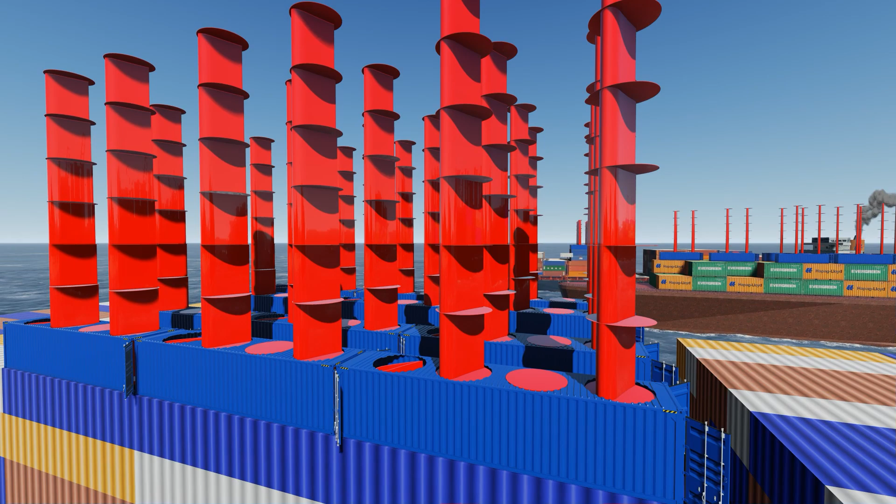So container wings is a solution for contributing forward motion of a ship, harnessing the power of the wind. These wings are fully adjustable. They're telescopic. They raise, they lower, they rotate according to the wind. And putting them on top of the last row of containers of a ship allows us to put back this big giant sea of sails, this sea of wings that can help reduce fuel consumption.

And by reducing fuel consumption when the wind is right, it means we reduce digging up all this fossil fuel, and we reduce emissions that contribute to climate change. The container wings that you see here are part of a really sophisticated system. There can be literally hundreds of these things on a ship, and they're all rotating autonomously, finding the best angle pointing towards the wind to contribute towards forward motion of the ship.

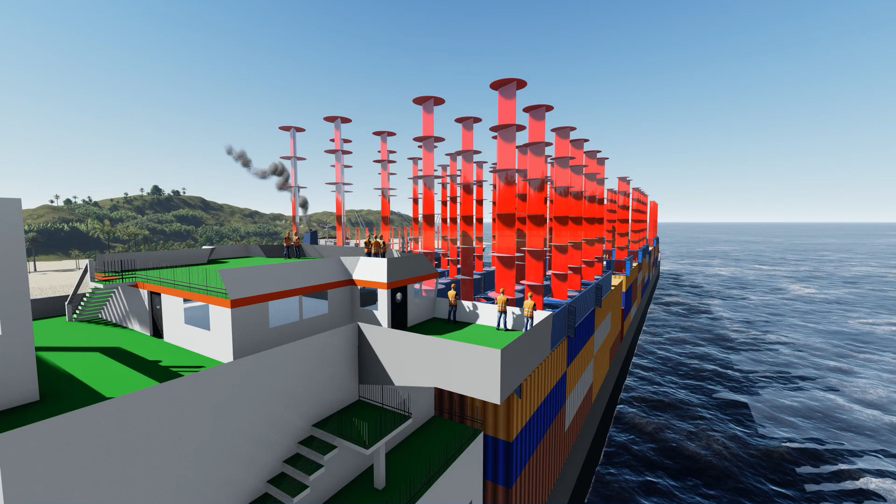They all talk to each other, they all know where they sit relative to each other, and through a wireless network, they're all controlled back at the helm of the ship. So not only are they autonomously controlled, but they're obviously controlled manually as well in varying weather conditions. And as the wind changes, they can be lowered. So container wings can be adapted to any ship.

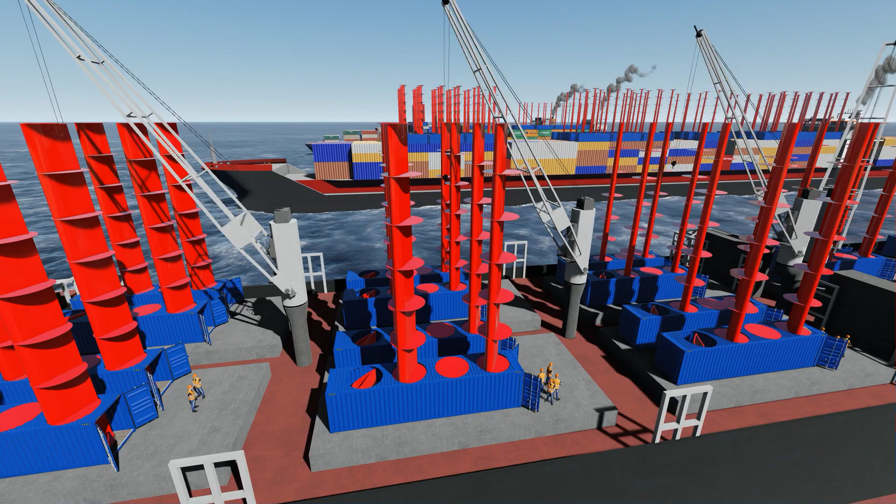So looking at a bulk carrier, the containers can be mounted to the lids that open up above the containers, and you can contribute to reducing the amount of fuel that's used, and to lowering your emissions, by including a mechanism that uses wind to assist in forward propulsion. On this ship we can see 20 containers, each carrying 4 wings, and they're 50 feet in height per wing.

The nature of shipping and logistics means that the wing containers can be located at various ports. They can be picked up depending on the run. So if there's going to be a crosswind run or a downwind run, maybe a ship really wants to stock up and load up heavily with the wing container system. Maybe there's not that many available in a port, but they can pick up whatever's available at the time.

And particularly if they're expecting crosswinds or downwind runs, the surface area and the actual wing shape of the container wing is obviously going to contribute towards forward motion as best as possible. The shipping of containers is an amazing logistics game, and as part of shipping, ships need to know what the weather's doing at all times.

Yes, they run to deadlines, but you may be in a position where this ship is running downwind or a crosswind, and it can pick up enough of these container wings to contribute towards lowering fuel consumption and lowering emissions. The software allows for delivery of the containers to be loaded on last as part of the ship's organisation. They get unloaded first, they get put aside.

The swapping of containers gets done in a port, and then of course the container wings get put on last. And of course, being containers themselves, they don't need to have their wings up. They can be shipped around the world just as regular containers.

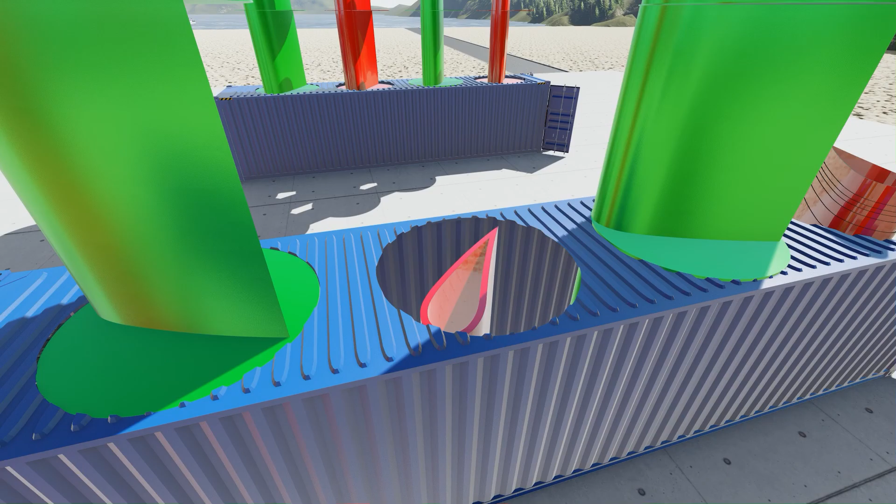We're just having a bit of an opportunity to look inside the container at the shape of that aerofoil wing. They're deliberately not symmetrical. They're deliberately in an asymmetrical wing shape. We do this because it's far more efficient.

Looking at the containers themselves, they've obviously been modified. So this is a 40-foot shipping container. It's had 4 holes cut into the top of it. And the wings, there's 2 starboard wing modules and 2 port wing modules. And they are simply forklifted in, and each of the modules can be easily taken out and loaded back in.

So this shipping container is a standard shipping container. They can be built as a double shipping container, but it makes it very difficult to obviously transport them around when not on ships, i.e. via the road.

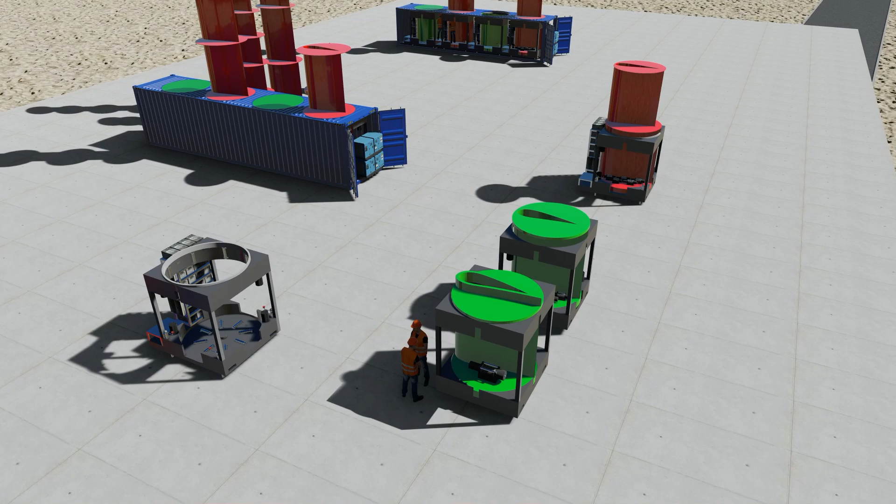So let's have a look at the individual units themselves. At the base of the wing, you'll be able to see 2 winches. These are what are known as captive winches. They're electrically operated, and they're connected to cables, and the cables are rotated around a drum, and when wound up, they lift the telescopic action of the wing.

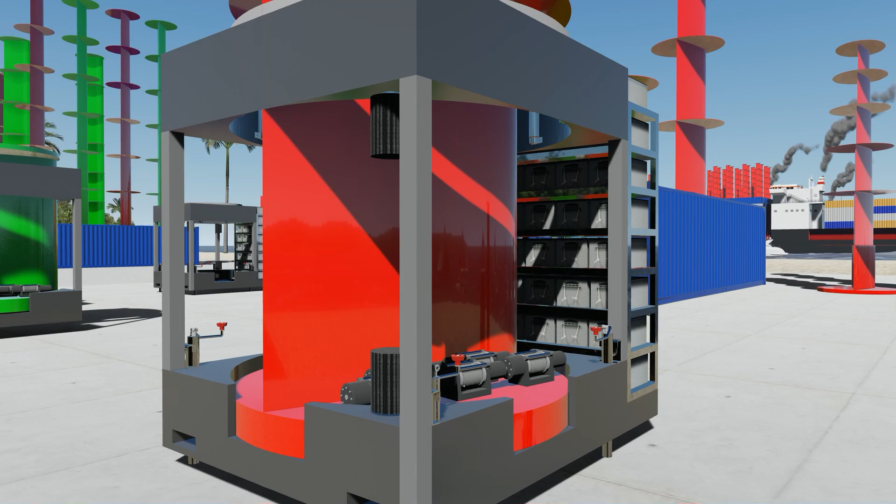This one has 5 units on either side. This one you can see the telescopic action is partly up. The winches, there are 5 captive winches at the base for the 5 individual sections, and also we need winches to be able to pull these things down. So when they're under strain or an immense amount of sideways pressure, they become really difficult to pull down.

You can see the battery pack at the front end or the rear end of this unit. Typically at the rear end, it's a huge amount of weight to put in there, so the forklifts can access it from this side, sitting on 316 stainless steel. You can see the battery chargers per bank there.

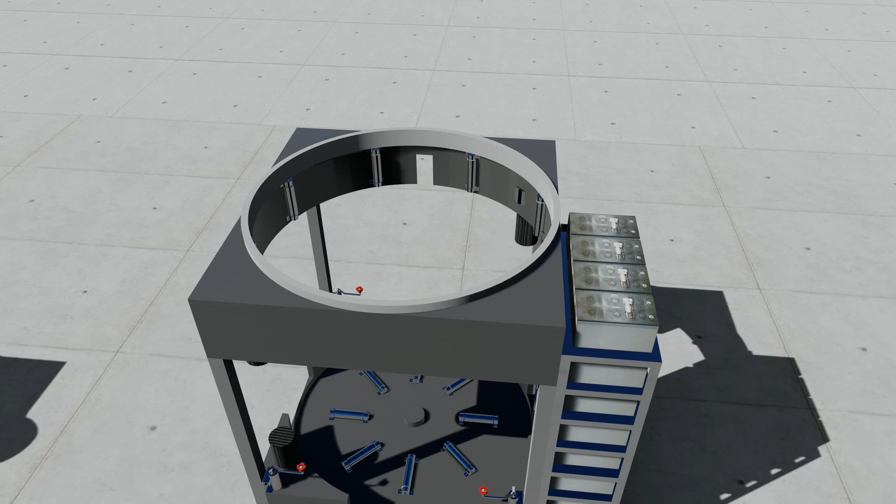And there's also what's known as screw jacks. These are an electrically operated screw jack that pushes the unit up into that ring. You can see the white ring at the top there. That gets pushed up against the ceiling, making it a really good snug fit against the ceiling, and the feet go down and lock it into the base of the container.

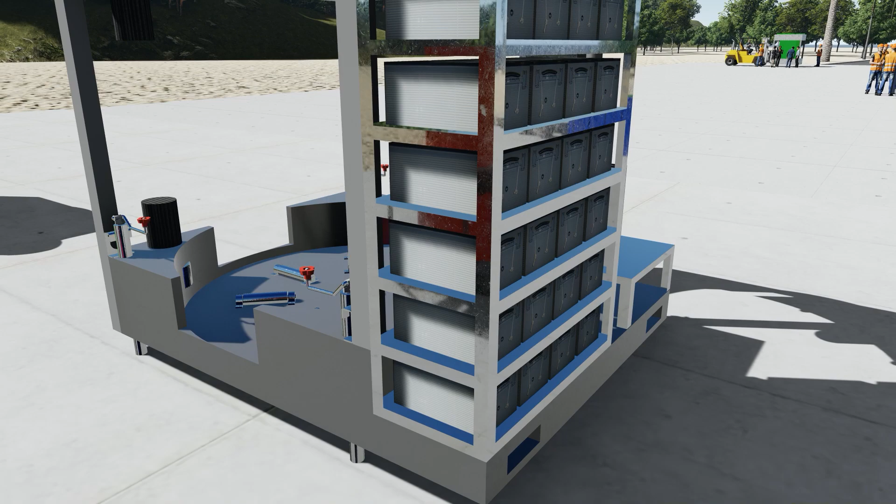The wing itself rotates around. You can see at the base there, there's some drum rollers there. There's a gearbox on each of the corners which drive it, and you see those motors. There's 2 on the bottom and 2 on the top rings, and they drive it.

There are 7 rows of 4 batteries, 28 batteries in total. There's a 24 volt system on a 316 stainless steel frame. These batteries are 250 amp hours each, and you can see next to them the chargers, the battery chargers.

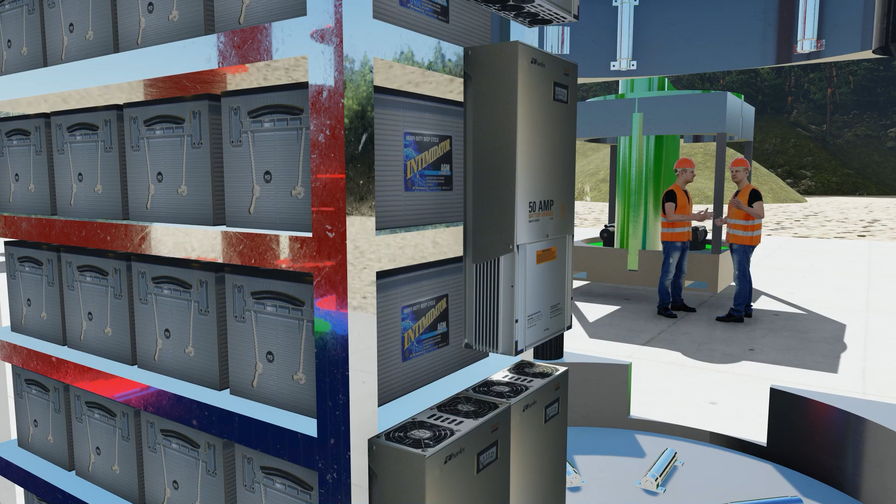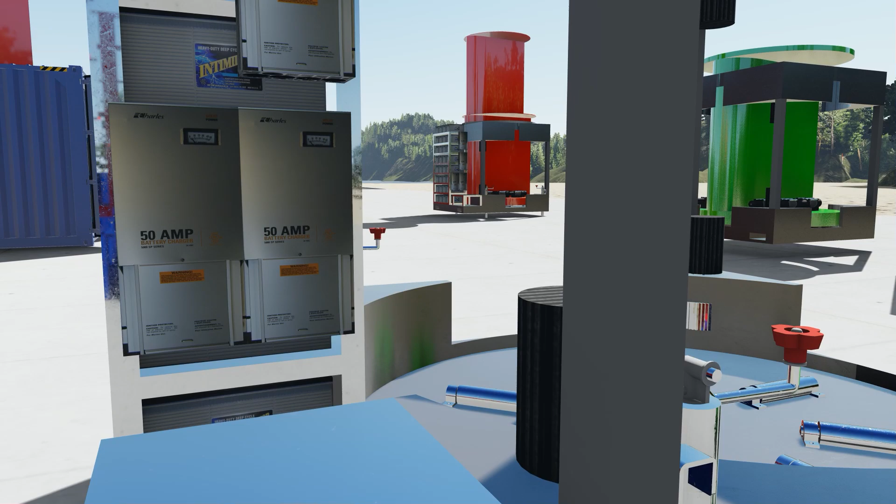Now each container has a series of generators, or these can be powered up via the ship's power. In front of us, that black round object is one of the motors that drives the rotation of the wing.

You can see there the handles, which are part of the screw jacks. There's actually an electric motor inside this corner here. The handles are there as a backup for manual operation, and of course that very, very important top ring to make it fit into the top of the container very snugly.

So looking at the modules inside the container here, the last component that goes into the container is the generators. The generators are left to one side because we want to be able to have service access down the side there. So you can see this nice clear avenue from the front of the container to the rear of the container, and the service technicians can get into the space and access all of the winches, all of the batteries, all of the chargers, everything that they need to do their service and maintenance on inside the container.

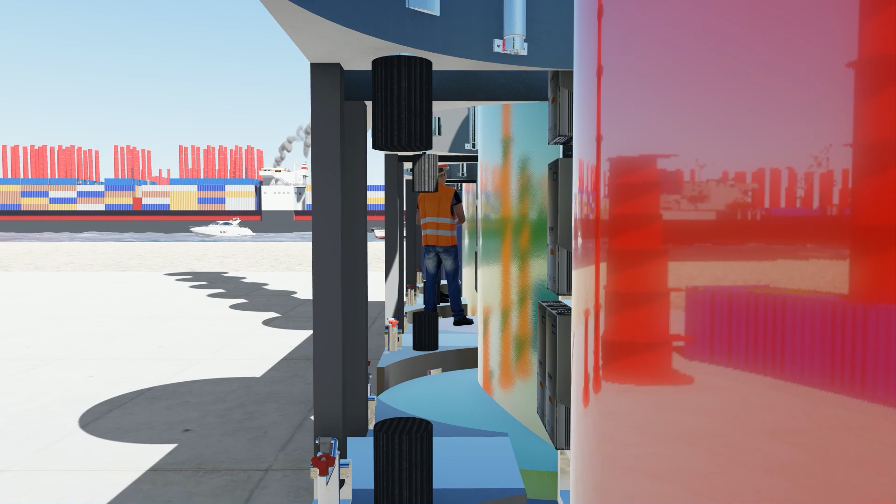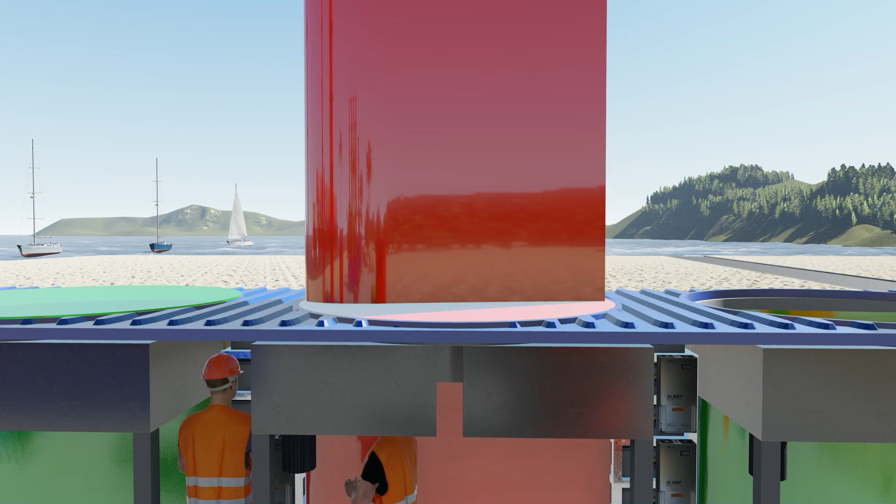So the container contains the 4 wings. The side of this container has obviously been removed so that we can have a look inside of it. And so each of the modules, when they go into the container, they are effectively pushed together, nice and tight, and they get locked into the floor, they get locked into the ceiling, they become absolutely fixed in position. There's enough working space inside to be able to manage the batteries, manage the chargers, and service all the motors.

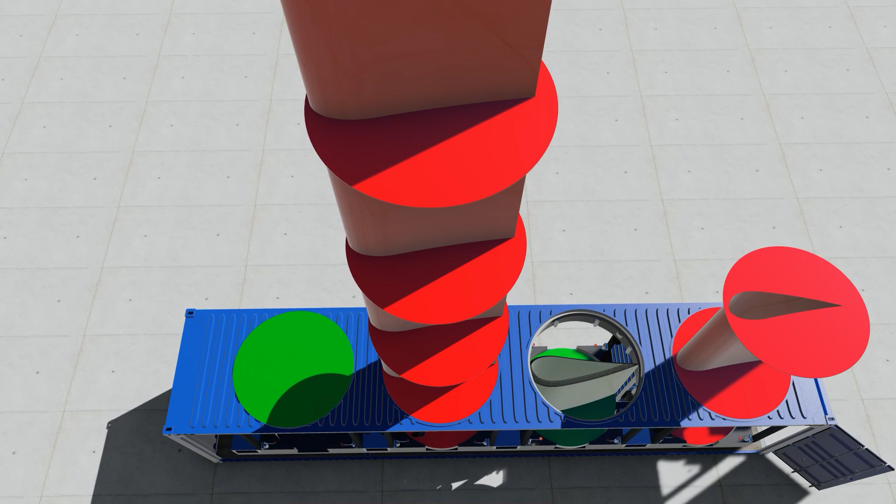You can see here this red wing, the port side wing, is extended fully. Next to it is an open hole that we can see the wing inside of it and the ring structure. That's really important to seal into the top of the container. On the left, the round disc. This is the top of the very final disc that sits on top of the wing, and when these are retracted, it comes back and actually makes a seal on top of the container. So when they're all retracted, the container is nicely sealed and weatherproof.

The wings themselves are designed like a glider wing, so we're looking for maximum lift and least drag, and we can achieve this with a very tall, narrow structure. The curvature of the leading edge is highly important, and the sharpness of the trailing edge is also really important for not creating disturbance for the other wings.

Each of the wings have a series of wind instruments, so direction and speed, and they all talk to a central processing unit, and this processing unit allows the wings to be directed and turned to be most efficient at all times.

The standard module is designed to fit in really snugly, so it's 2.4 by 2.4 by 2.7, which is the internal size of a standard shipping container. And in the 40-foot shipping container, we can put in 4. Typically, only 2 of those sails will ever get used at a time. So either the 2 starboard or the 2 port side wings will ever be extended up.

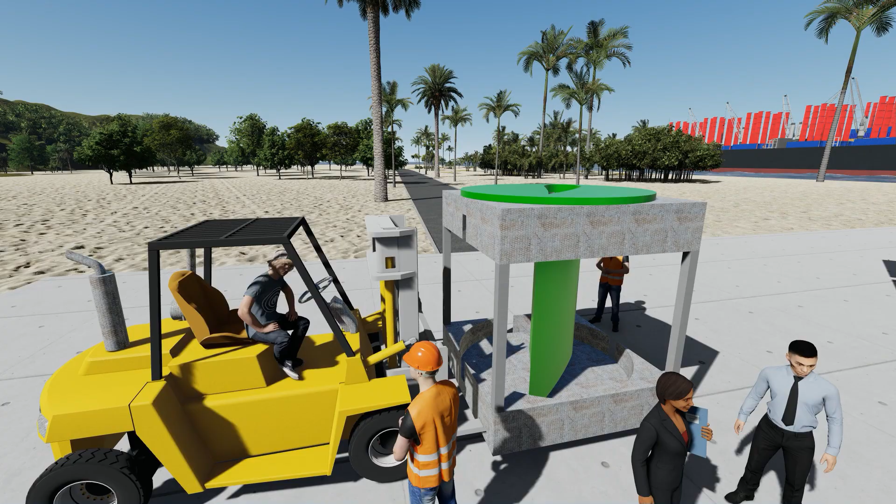You can see here a module being ready to be loaded in. A standard size forklift can pick up all of the modules. The modules are designed to be able to be built, obviously, serviced anywhere around the world, repaired on the go, swapped out at various ports where servicing is available.

The frames are made out of steel. There are stainless steel components, and the wing itself is made out of marine grade aluminium. It needs to be very strong. It needs to be able to be cut and shaped and welded. And it also needs to take considerable loads.

You might be wondering what those round discs are between the segments. So they're designed as the wind is swept up the sides of the ships. They trap the air and ensure that it runs perpendicularly over the surface of the wing for maximum efficiency.

So whilst we might be in the process of developing new technologies and new power like hydrogen fuel, for example, in the meantime, what we could be doing is contributing to reducing fuel, reducing emissions by adding the container wing to container ships. It's not likely that our reliance and dependence on container ships is going to go away. And until those hydrogen-fueled engines come in, let's contribute to making these container ships more efficient and cleaner on our environment.